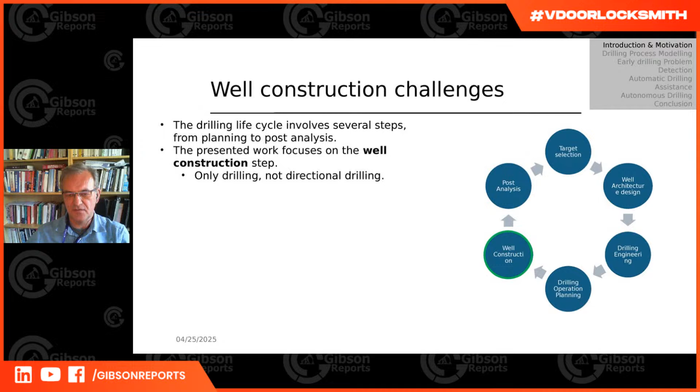So for the introduction and the motivation, I like to focus on the fact that in drilling there are many different aspects - target selection, designing wellbore architecture, and all these kinds of things. This presentation for today will focus only on well construction, the operational part of it, and the rest can be left for another topic.

Oh wow, that's a bit of a messy slide, but the point of this slide is just to say that most of the software used out there uses steady-state models, and steady-state models are not really well adapted to actual drilling operations, just because there is a lot of transient periods. As you can see here, during this friction test, the steady state model, shown in green curves, will jump right from free rotating weight to pickup weight, and then just jump to slack-off weight, while actually the measured values are changing slowly. This is reflected by the fact that there are some transient effects that are happening.

The point also with drilling operations is that there are quite often drilling incidents, and these drilling incidents are causing delays. The more we try to avoid those incidents, the better it is actually for the efficiency of the drilling operation.

So the other thing is that there is a lack of consistency. If you see here a set of friction tests executed by drillers, there is a lot of variation in this series of friction tests, even though they are made in the same operation. That is not very good to extract information out of the drilling operation. Probably some of those friction tests are not efficient, and others are not capturing what they should have been capturing.

So the question we have been working on at the research center is: can we do a mathematical modeling of the drilling process with enough detail that we can reproduce what is observed? And therefore we can use that model for providing inputs during the drilling operation.

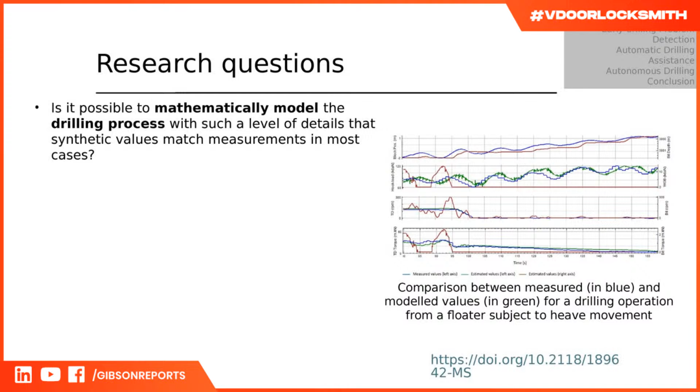So here you see a drilling operation offshore of Norway, where there is heave. You can see that when we are drilling, there are variations of the block position because of the imperfection of the heave compensation system, and there are very large variations in the weight on bit. Even though these variations are quite complex and affecting the drilling process, the modeled values are getting very close to the actual values which are measured. This shows that it is possible to do this drilling process modeling at a very good level of detail, which can match reality.

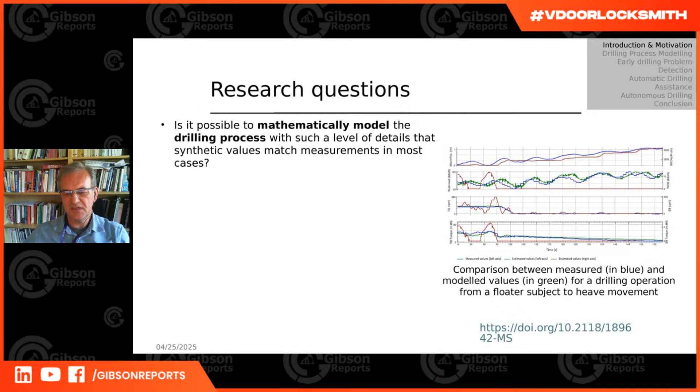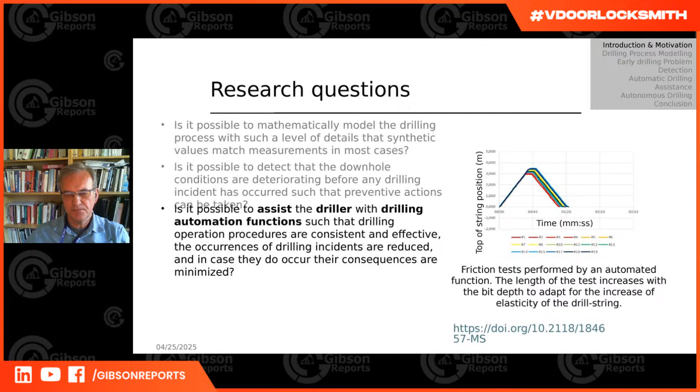So how can we achieve that? How can we do all this? How can we answer all those questions that are listed there?

First we need to start with trying to model the drilling process as precisely as possible. This is strange because there are quite a few things jumping over, but okay, that's the way it is with the presentation.

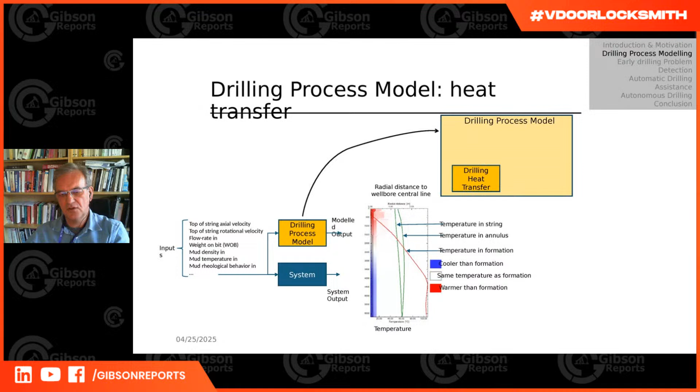One of the first things we need to consider is that in drilling operations, we have very large gradients of temperature between the surface and the downhole conditions. Therefore, we need some kind of modeling of the heat transfer during the drilling process. This is done by a heat transfer model, which calculates the temperature of the fluid inside the string, the temperature of the string itself, the temperature of the fluid in the annulus, and also everywhere in the casings and formations. This allows us to calculate the temperature conditions everywhere in the system.

Now the sources for this calculation are coming from different conditions. There is the advection of fluid into the transport. It should have been an animation, but I see the animations are not working on the display, so sorry about that. There is heat generated by the pressure losses, because these pressure losses are converted to heat generation. And there is also heat provided by the mechanical friction of the drill string against the borehole. All these change the conditions of the drilling operation.

If the animation had been working, you would have seen that for the first 6 hours of starting the drilling operation with circulation and rotation, there is a drastic change in the temperature conditions into the well.

So you see that we had the model which has to do with drilling heat transfer. We need a model for drilling hydraulics to calculate the pressure losses. We need a model for drill string mechanics to calculate the friction. And these are actually giving inputs for the drilling heat transfer calculation. So there are some mutual interactions between those different models.

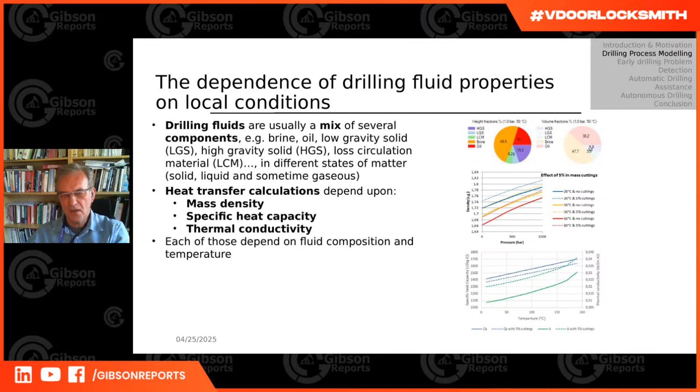If we carry on, we can see that the drilling fluid is a mix of different components, and each of those components has different PVT behavior, specific heat capacity, and thermal conductivity. Each of those values depends on both the temperature and pressure conditions. That will influence the calculations for hydraulics and mechanics, because the change of heat will impact the calculations for drilling hydraulics and drill string mechanics.

In addition, we are transporting cuttings. Those cuttings change the composition of the fluid, because of the solids that they are transported. If the animation had been working, you would have seen that both the mass density, the specific heat capacity, and the thermal conductivity would be impacted by the cuttings which are transported through the drilling process.

And conversely, this change of the thermophysical properties of the fluid impacts also the heat transfer that we have into the drilling process.

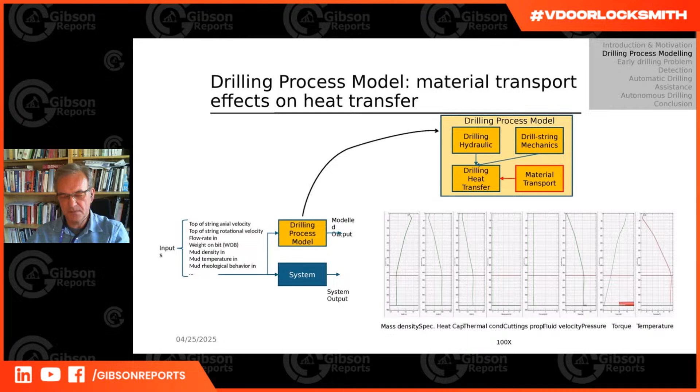Then we can continue with the pressure losses and the impact of the temperature and pressure conditions on the rheological behavior of fluids. There, again, we have strong variations of the rheological behavior as a function of pressure and temperature.

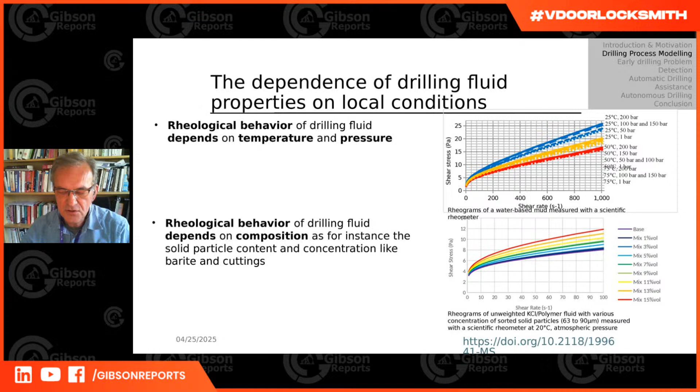As already mentioned, cuttings being transported also impact the rheological behavior. You can see on the lower graph that the rheological behavior at the same conditions of temperature and pressure varies a lot depending on how many cuttings we have in the fluid. All this has been measured with scientific rheometers for getting accurate results, so this is reality, this is not synthetic data.

Now, considering this, we have an interaction between the heat transfer and the material transport on the drilling hydraulics. If the animation had been working, you would have seen that during the drilling process, when we are producing the cuttings, the rheological behavior of the fluid is very different in the annulus when it is starting to transport cuttings.

So we start to have quite a few correlations between the drilling hydraulics, the drill string mechanics, the material transport, and the drilling heat transfer. And then we can detail more what happens with the cuttings transport.

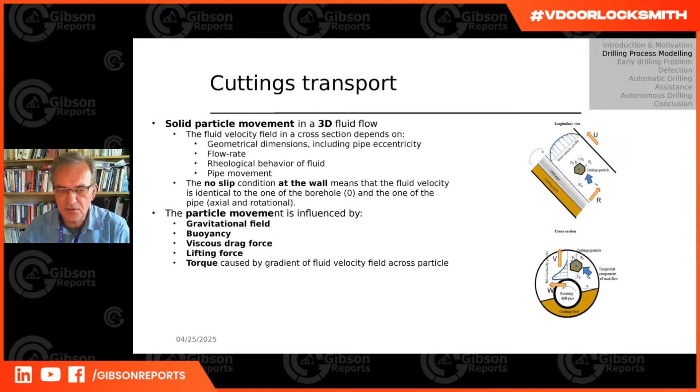So the particles are moving in a complex path depending on this fluid velocity field that we have into the annulus. And they can get transported directly if they get caught into the high velocity field, which is usually on the high side.

But some particles may be deposited on the low side, and others may be transported simply by erosion of the cuttings bed, if there is a cuttings bed which is forming, and if the drilling conditions are changing. So maybe some of the cuttings into a cuttings bed get resuspended and get transported on the high fluid velocity field on the high side.

So there is a lot of variation which can happen during the drilling operations, and the cuttings transport is a very transient phenomenon.

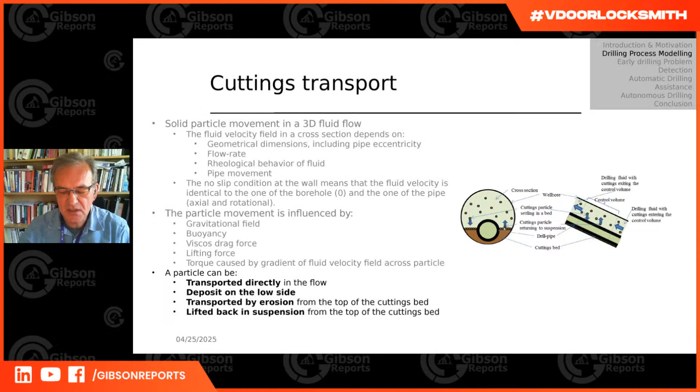So again, there is no animation, but the point was to show that actually when we do a connection, the cuttings which were transported in suspension may go back into a cuttings bed during the connection time, because in this horizontal well, the distance for the cuttings to sediment is very short.

And then when we restart the circulation, if we don't have the rotation, this cuttings bed doesn't disappear instantly. It takes time, and it's only when we have the rotation of the string that we can start to lift the cuttings which are on the low side towards the high side, and the cuttings bed disappears. So again, at every connection, you may have quite a lot of variation in the positions of the cuttings during the drilling operation.

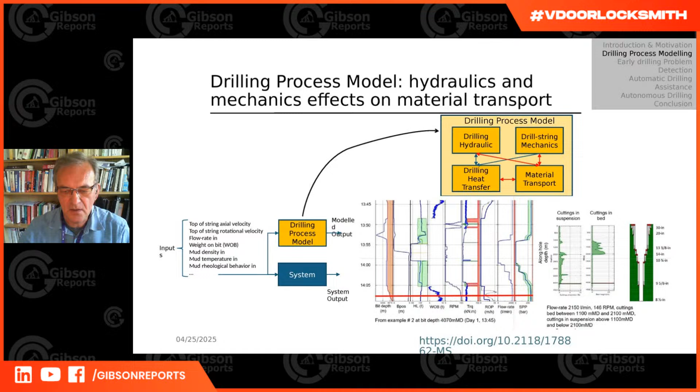And then also the cuttings get grinded when they are transported. Some of the cuttings particles are transported on the high side, and they don't get trapped below tool joints along the string. But some others may be more unfortunate and get trapped between the tool joints and the borehole, and because of the rotation, they get grinded.

And depending on how many times those particles are grinded, some particles may never be grinded at all, and they will come to the surface as they have been produced by the bit, relatively large. And some others may be more unlucky and get grinded many times, and they get smaller and smaller and smaller.

And that's what we observe at the shakers, at the level of the shaker, is that we have a large distribution of cuttings particle size which arrives there. And that may depend on the size and the duration of the operation.

So the cutting size distribution for a 17.5 inch operation is different from the particle size distribution for a 12¼-inch or 8.5 inch section, and depends also on the energy which is provided to the rotation of the string. So the more rotation you put, the more grinding you can get also.

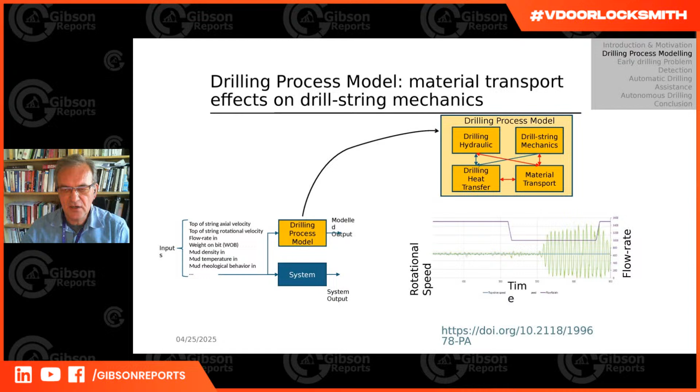And when we start again and regain the flow rate to a larger value, these stick-slip conditions disappear after some time. So there is a direct connection between material transport and string vibration effects.

And talking about string vibration, an important thing that we learned is that there is a transition between static friction and kinetic friction. This transition between static and kinetic friction is very important because it creates specific conditions for how the string behaves when we start rotation, when we change directions, and all these kinds of things.

So we use an Stribeck model for the transitions between static and kinetic friction. We also solve the problem of what the actual friction force is when we are in static conditions, which is undefined from the friction equation, but is defined by the equilibrium of the string. And this is quite important too, to keep the string non-moving when we are in static conditions.

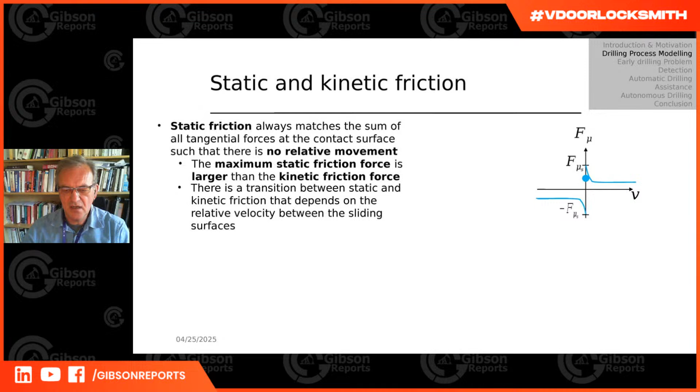The other things we've noticed is that when there is rotation or movement, the kinetic friction is more or less constant regardless of the direction. The friction force is always opposite to the displacement vector. And that means there is an easy path between the axial movement and the tangential movement, so you can easily move from axial displacement to torsional displacement because the kinetic friction magnitude is more or less independent of the movement itself.

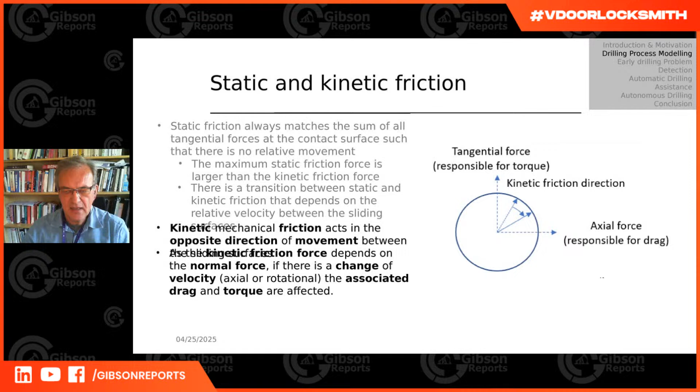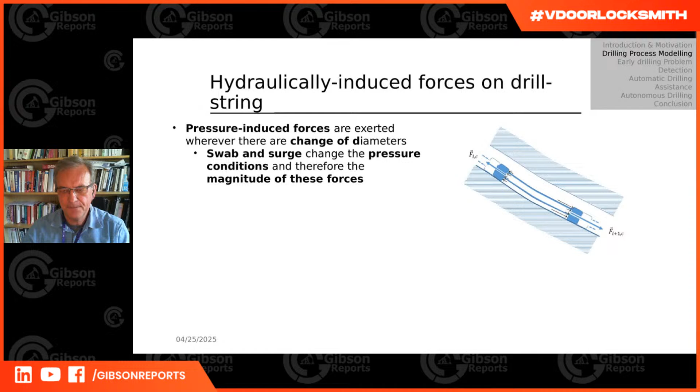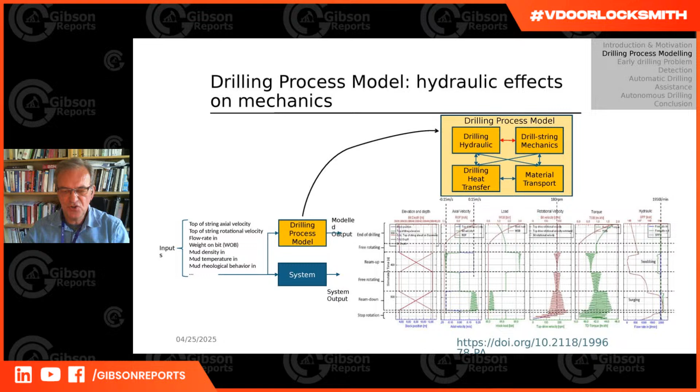So there is a direct interaction between drilling hydraulics and drill string mechanics. As you can see from this graph, the hydraulic model, the drill string mechanics, the drilling heat transfer, and the material transport are in complete interaction between all four modules. You can't consider one independently of the others; each of them influences the others completely. So it's really important to consider all those aspects at the same time, including the mutual interactions between those different models.

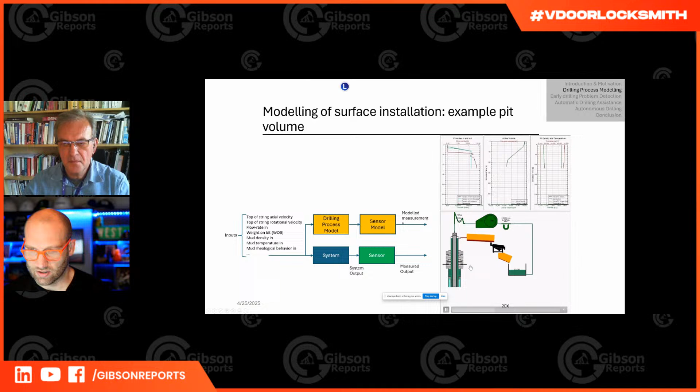And that gives Eric, actually the— yep. I'll pause you real quick. Is there a possibility you can share your screen with the presentation, so the animations will come through? Yeah, I can present. How can I share? If I click on present... present, and then at the very bottom of that list it should say share screen. Yep, okay. Yeah, share screen. Yes. Can I share the whole screen? Entire screen? Yes, I see that. Share. Nothing happens, let me remove... Okay yeah, so no that's me. Yeah, no, okay I think I'm sharing. There we go, yes, okay good. Let me see if I take this presentation. Yes. Okay yeah, and then I will go to, yes I was there. And if I do like that, yes, do you see the— yes. Presentation? Yes. And do you see the animation? No. Let's see here, do you see the graph which is evolving here? Yes, everything's going, let me just— there we go, we can make it a little bit bigger. Okay yeah, so everything's working now. There we go, okay good. That's good.

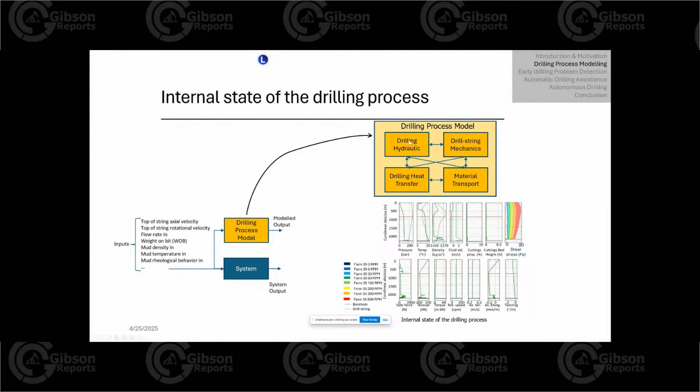So what we've seen is that by having these four different models—drilling hydraulics, drill-string mechanics, drilling heat transfer, and material transport—tightly connected together, we can calculate the complete internal state of the system. This internal state is shown with these different graphs: pressure, temperature, density, fluid velocity, cuttings proportion, cuttings bed height, rheological behavior, side forces, tension, and plenty of other things. With the model we've developed, this internal state is calculated every 10 milliseconds and updated compared to the inputs we give to the drilling process.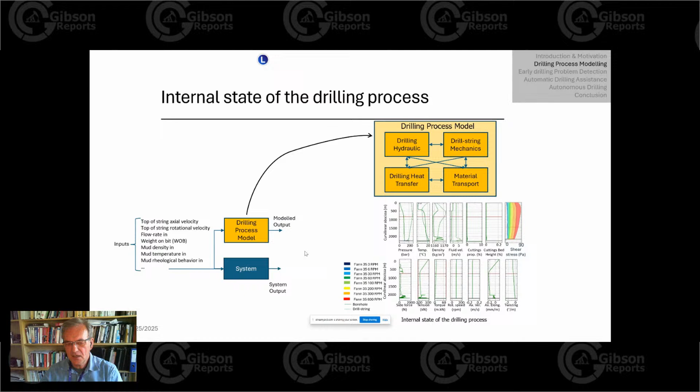So that sounds good. And we do manage to reproduce very well, actually, the output of the system, where it is measured. For example, the standpipe pressure and the hook load and all these kinds of things. But there is an additional complexity, and this additional complexity is that actually what we measure with sensors is not necessarily the same thing as what happens in the physics.

I'd like to illustrate that with the pit volume. If you think about the flow rate in and flow rate out, and you want to detect a kick or things like that, you want to know what is the flow rate out of the well. And the point here is, before you get a change into the volume of the pit, that will happen after the fluid has been transported through the flow lines, has been separated with the cuttings at the shale shakers, and the remaining fluid is getting back into the pit.

A lot of people are talking about wellbore breathing and other things, but there may be wellbore breathing, but most of it is explained by two things: compressibility of the fluid inside the well, and the retention of fluid into the surface installation, transport of fluid.

And you can see here also we model actually the flow of fluid into the open channel for the flow lines, and the separation of the cuttings into the shale shakers. And you see how much delay there is and how much retention of fluid there is into this system.

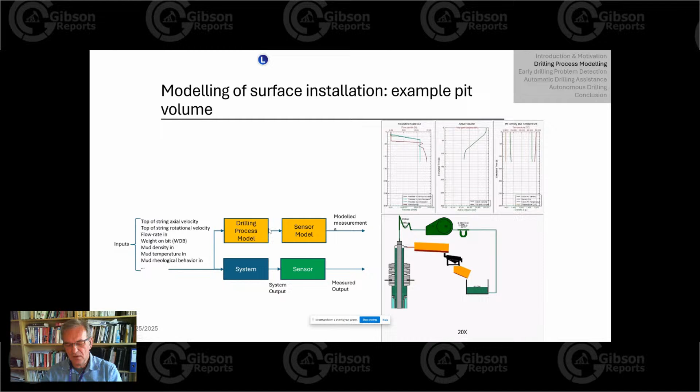Another thing I would like to draw attention to is that even things which are very well accepted and well used, actually the Fann 35 rheometer values, you should be aware that they are not correct. Because actually the Fann 35 rheometer gives you a translation of torque into shear stress, assuming that the fluid is Newtonian. And as we don't use Newtonian fluids, this conversion is wrong.

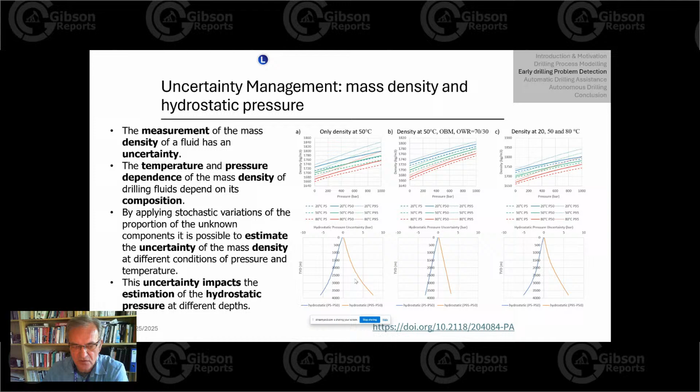I would like to illustrate the fact that even the density of the fluid is somewhat uncertain, because first it's measured with instruments which are not very precise, but also it depends on pressure and temperature. This PVT behavior that characterizes this pressure and temperature dependence is usually not measured, so we rely on models, and those models are again not completely correct, so they have some uncertainties. That can give quite large differences in estimations of hydrostatic pressures at depth. When you have geopressure windows in the region of 10 or 15 bars in some regions, as we have somewhere in Norway, if you have an uncertainty of plus or minus 5 bars just on the hydrostatic pressure because of the uncertainty of the density at different conditions of temperature, that's quite dramatic.

The measurements of rheology, as I explained, first need to be corrected for all those non-Newtonian effects, but depending on how you read your rheometer, especially if you use a mechanical rheometer like the Fann 35, you may get different results. That has to do with thixotropic effects in the fluids, and you need to wait quite long before the measurements are stabilized. Because of static friction in the mechanical rheometers, you usually can't see those effects - you really need a scientific rheometer to understand how important they are. That means the same fluid measured by different people can give different results simply because of those thixotropic effects.

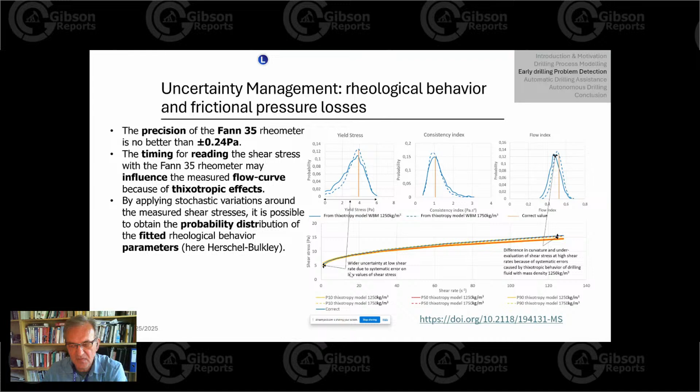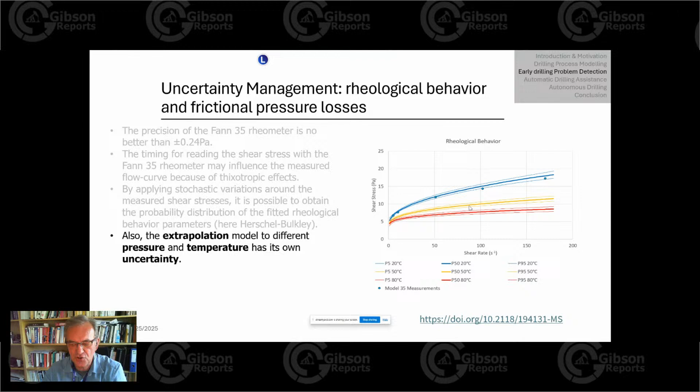And then when you want to use that rheological behavior at different conditions of pressure and temperature, you need to use a model to extrapolate, and again the extrapolation from the model gives some uncertainties. As you see from this graph, the measurements are shown in blue. The extrapolations are made using models, but they are associated with P5 and P95 margins for the uncertainty on these measurements, using the models that are used to extrapolate for different conditions of pressure and temperature.

So some of the information is uncertain, or not necessarily uncertain, but ill-defined, and therefore we also need to adjust the calculations that we have with what is measured.

But this information may not change during the drilling operation. So, for example, the linear weight of drill pipes, the exact internal diameter of drill pipes may not be known exactly at tenths of a millimeter accuracy, and that impacts quite a lot the pressure losses inside the string. Half a kilo per meter error on the linear weight of drill pipes may also impact quite a lot the free rotating weight, so we need to do some corrections.

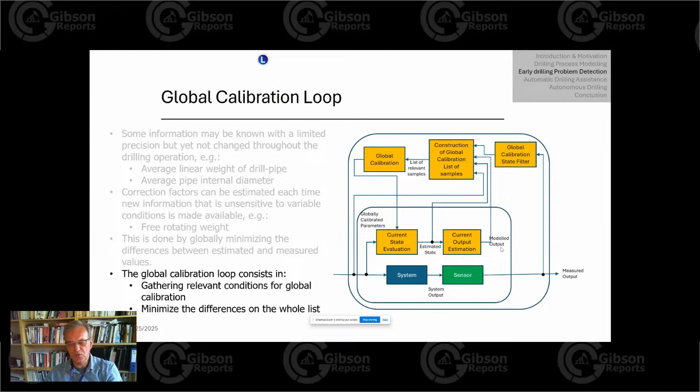But not all the parameters are unchanging through time. There are some parameters which change with time, like the mechanical friction or the hydraulic friction. It's not that the friction itself is changing, it's that there are some additional effects which are not accounted for by the model, which influence the results.

So there we use local calibration loops, which make sure that we calibrate the model so that it actually fits the measurements. You can see here with this friction test, with a free rotating weight period, then stopping the rotation, then doing a pickup, and then a slack off, the model matched very, very well compared to the first slide I presented, where we were using this steady state model.

You see that the transient model has a very good match, and it also accounts for the fact that the driller forgot to zero torque the top drive when he stopped the rotation. So there is still twisting of the drill string while we are doing this pickup. Even when we are finished with the slack off, the drill string is still twisted inside the well, which means we have not yet measured the true pickup weight or slack off weight for this test. But the calibration of the friction factor has been able to be done, even in these strange conditions.

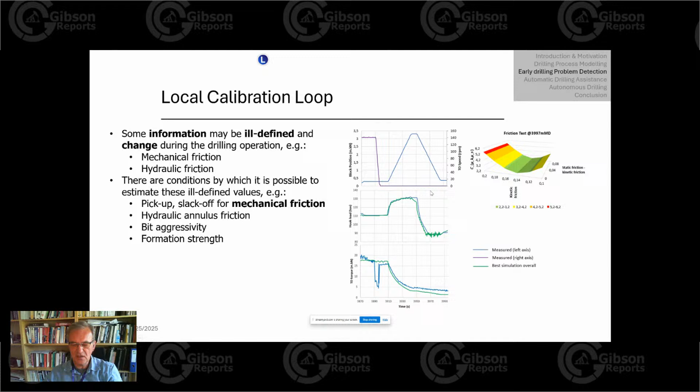Therefore, we can add, in addition to the global calibration loop on top of the digital twin, these local calibrations for a certain number of parameters, like the mechanical, hydraulic, formation strength, and bit aggressivity. With that, we've got a system which can tell us what is expected, but with the uncertainty.

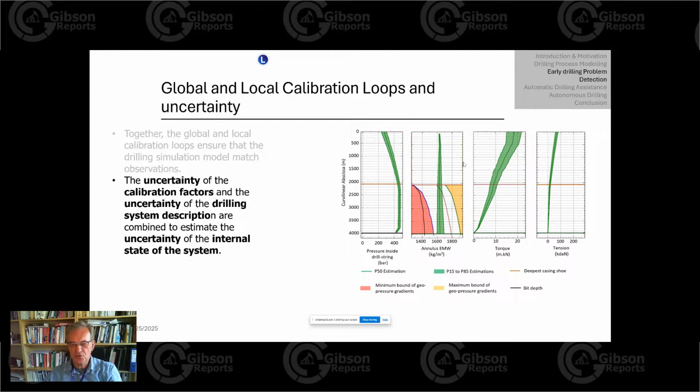Depending on the quality of the calibration which has been made, the global and the local calibrations, this uncertainty may be small or large. So there is also a reflection through this uncertainty of the quality of the work which has been done for the calibration, and therefore it gives us more or less confidence on any potential detections of abnormal conditions.

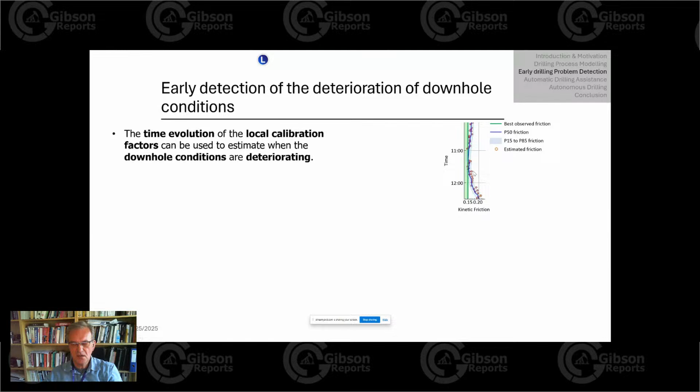So what happens if you see that the friction was relatively steady and then suddenly starts to increase like that? You see again that this friction has been calculated with some uncertainty, which is this blue, light blue band, indicating the P15 and P85 margins for the calculation of the uncertainty of the friction. But then you see that you are deviating so much that you are very outside the initial conditions you had here. So probably there is something deteriorating in the hole, and this is a good indication that it is time to think about what is happening there.

Another thing you can see from this animation is this gauge showing the hook load. There is a needle, and then there are two triangles in green, which follow the needle, but sometimes the needle goes much below the lowest triangle. Those two triangles represent the uncertainty that we have on the measurements or estimation of the hook load. You see that sometimes it's going above, sometimes below, and that's indicating some set down weights and overpulls.

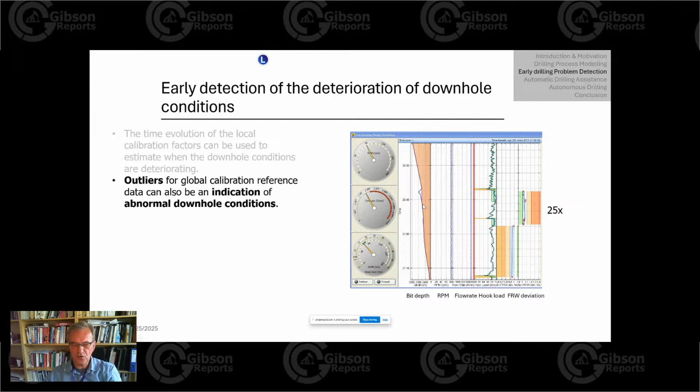So that is also a way to detect abnormal conditions, when you have some small deviations compared to what is expected. And then I need to change my presentation to the second one.

Okay, here. Eric, try to go back and redo it. When you do the present and then it says share screen, instead of entire screen, hit window. That might make it so, because there was a lot of blank space on either side there. Okay, so let me try to find. There's some details in there, I want to make sure that everybody's able to see.

Sure, so I go to present and then share screen and share. We do have one question as you're pulling that up: are references used to develop the model available in the public domain?

Many of the models that I've been talking about now are not available in the public domain, but we are working on a transient torque and drag model that is being developed right now, which will be put in the public domain in the open source drilling community site. That will be available towards the end of the year. It's a very fast transient torque and drag model with axial, torsional, and lateral modeling.

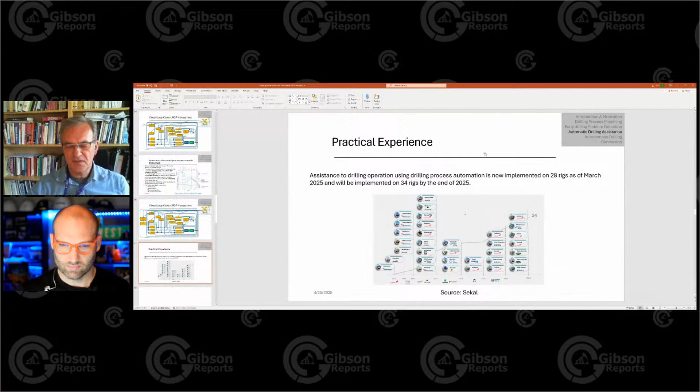Hopefully that can be useful for some people. It's developed in C#, and will be packaged into a microservice that everyone can use—no royalties, no fees. Hopefully that can be a reference for people afterward.

As a reference also, we have a simulator which is available online. You don't get the source code, but you can use the simulator. It's called Open Lab Drilling. If you search for Open Lab Drilling, you'll get access, and you can run the simulator for half an hour at a time for free with a Google account. If you want to run simulations longer than half an hour, you need to pay, but you can do a lot of simulations lasting less than half an hour.

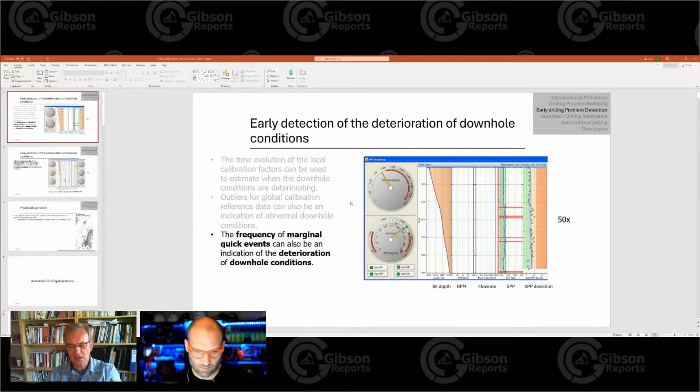Going back to the questions of detecting abnormal conditions, here is an animation showing a situation where we have poor cuttings transport.

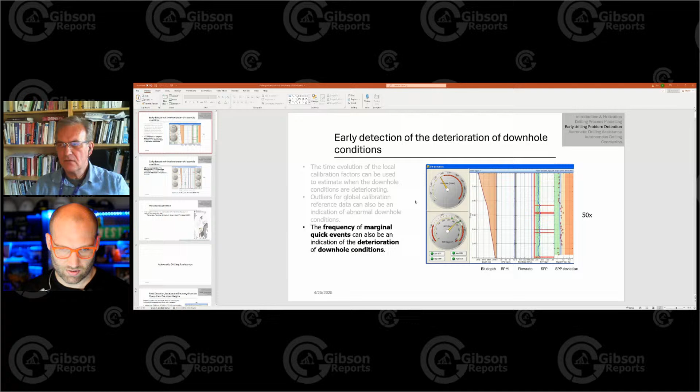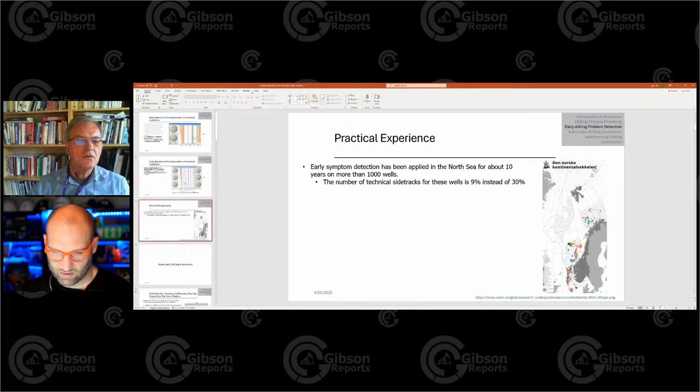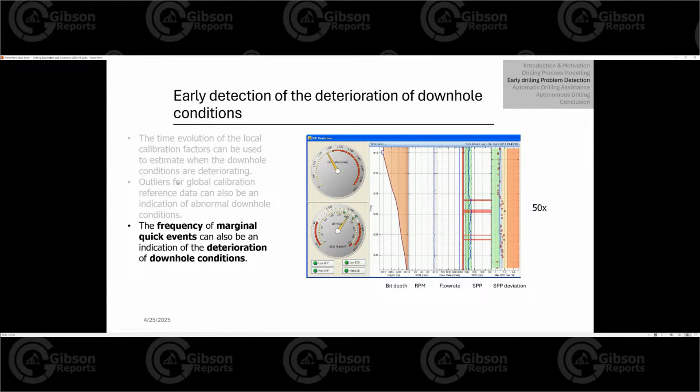You see here—Eric, can you make that full screen? It is full screen, on the presentation or in the PowerPoint portion. It's, yes, in the PowerPoint view. Is it? Okay. Because I'm doing the slideshow. Yes, and when I do slideshow, you don't see the slideshow? No, it's still in the previous view. Ah, okay, maybe reader view. Should be the next one over from there. Slideshow. View. Reading view. Okay, still—that's because my screen is very large. Oh, that's okay, that's okay. It'll still work, I'll just set it larger and put you down at the bottom. Sorry, I don't need to be on the screen. No, it's okay, all right. I'll let you keep going.

So basically, what we see in this operation is we are drilling and circulating, and you see the blue curve here in this standpipe pressure track is the actual standpipe pressure which is measured. The green curve is showing the one calculated by the model, and you have a band of green showing the uncertainty on those calculations. As you can see here, there are some periods where the actual standpipe pressure is slightly larger than expected, and then it returns back to normal conditions.

But it more or less stays within the margins of the uncertainty. This translates into some standard deviation in the distance between the actual standpipe pressure and the estimated standpipe pressure. This can be an indication, if this standard deviation is changing, that there are some changes in the downhole conditions.

There's another condition which also shows how these weak symptoms we're talking about can be used. Here is an operation—you see the needle showing the standpipe pressure, and the two green triangles showing the margins that should be accepted. You see that we are overpassing the margins with some high pressure spikes. This impacts the drilling operation and the driller pick off bottom, because you see there are some pack-off tendencies. At the end, we just stop the pump because there are more and more pack-off tendencies coming.

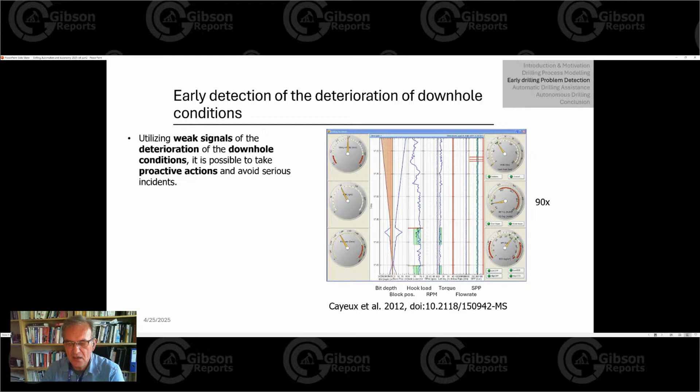So this is not only research—this has been used in the North Sea for the last 10 years. More than 1,000 wells have been drilled since the start. Using this type of weak symptom detection, the number of technical sidetracks for those wells has reduced from 30% to 9%. Just to let you know, drilling in the North Sea is very complicated because we have a lot of brown fields and quite difficult conditions for drilling.

That's why there were initially quite a lot of technical sidetracks happening. But there has been a very visible impact using this weak symptom detection for taking proactive actions on the improvement of operations—and that's a good sample of data when we're talking about more than 1,000 wells.

Now we move to assistance to drilling operations, drilling automations.

And the first topic I would like to address is what is called fault detection, isolation, and recovery. I will not go through all the different types of FDIR, but I will exemplify them with one, which is the detection of overpulls and set-down weight.

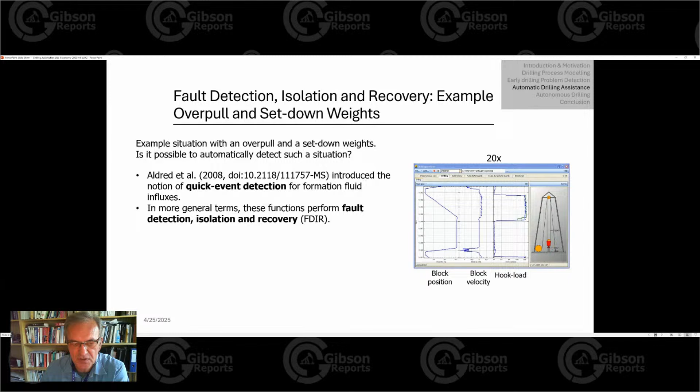Now, the detection thresholds need to depend on the context, the current conditions. So you may have some parameters which are changing fast, like the flow rate, like the air gap into the drill string, and so on and so forth. Therefore, you need to pass that type of information to the drilling control system so that it can react fast to those abnormal conditions.

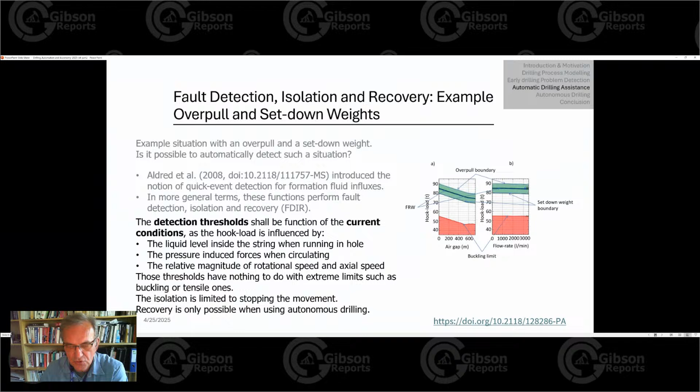So what happens is we have a drilling controller, the drilling control system, which is controlling the mud pumps, the top drive, the drawworks, or the hoisting system. There are some set points which are provided, and usually those set points are going directly to the controller. The controller manipulates the machines at the surface, and that influences the system. And then we have some measurements which are made.

And these measurements are utilized by this current state estimation, so all what I've explained in the previous part, which is this digital twin and the calibration mechanisms. And these calibrated models are used actually to calculate what are the thresholds by which the system should detect that there is an abnormal condition.

And when there is an abnormal condition which is detected, the FDIR function switches off the set point coming externally and replaces the inputs to the different controllers with its own procedure, typically described by a finite state automaton, which will try to isolate the problem in the first place, and then later possibly recover from the situation. So that's basically this notion of fault detection, isolation, and recovery - an automatic system which detects an incident and reacts immediately to avoid an escalation of the gravity of the situation, and that depends on this current state estimation.

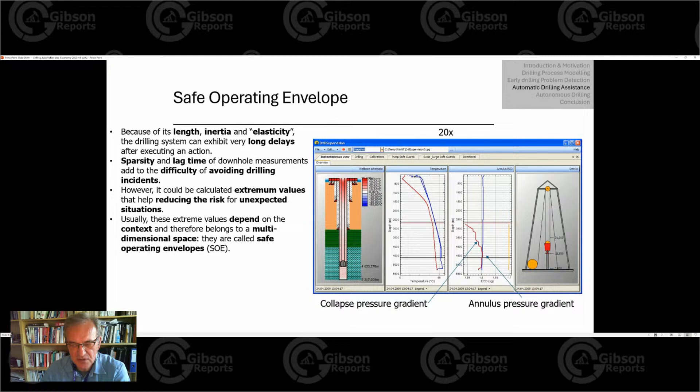You see here an animation from a real operation where we are pulling the string. We see downhole pressure in ECD as we are pulling the string, and we can see how the downhole pressure is below the collapse pressure, which is actually making the well collapse. So the speed by which the string should have been manipulated should have been much lower, so that we didn't go below the collapse pressure limit. So that's what we want to do, is to make sure that we have safe operating envelopes which are respected while we are moving the different components, like either the fluid or the drill string, either axially or rotationally.

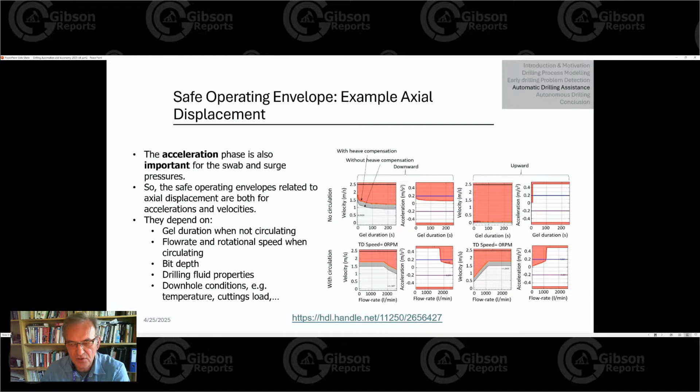And these safe operating envelopes are, for example, shown here for the axial displacement for swab and surge. They are both values which correspond to velocity, but also to accelerations. And there are different types of conditions, whether we are going downwards or upwards, whether we have circulation of fluid or no circulation, and whether we have gel durations or no gel. So all this can change quite fast, and therefore needs to be updated continuously to adapt to the current drilling conditions. So we add a new layer on this schematic for the control of the drilling operation.

The first, the innermost layer was the drilling control system. The next layer was the fault detection, isolation, and recovery functions. And then we have a new one, which is about the safe operating envelopes.

The role of the safe operating envelopes is actually to cut the set points which are passed to the drilling controller. So if the value is too high, then it's the value from the safe operating envelopes which is used. If it's vice versa, if it's a minimum value, if it's too low, it would be the safe operating envelope which is used.

So that means this can be used also in manual mode. It doesn't need to - both the fault detection, isolation, and recovery and the safe operating envelopes can take any kind of set points, whether they are coming from manual commands from the driller or from an automation system. And that's important. So the placement of those functions into the hierarchy of control is very important to allow for protections also in manual modes.

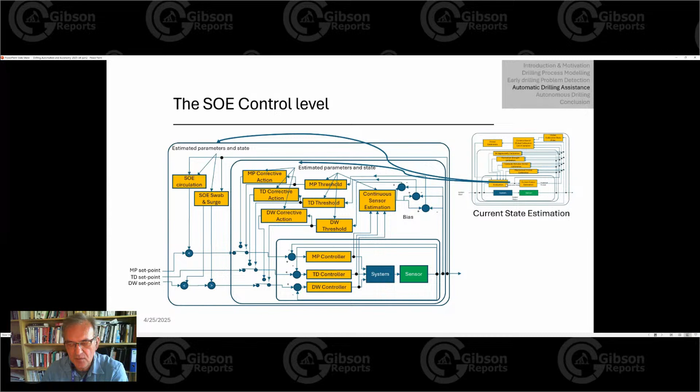Of course, the safe operating envelope depends on context and therefore depends on all these calibrations and digital twin that we described earlier. And then you have controllers like auto drillers. So the work that we've done is really based on the bit-rock interaction model from Emmanuel Detournay.

This model is based on 3 phases for the functioning of the PDC bit. Phase 1 is directly proportional to the depth of cut, and then there is a boost of performance in phase 2, because the friction part of the cutters is not increasing, it's stable, and therefore you can have a larger removal of rock for the weight on bit. And then in phase 3, you are going beyond the founder point, and you are starting to increase again the friction part of the cutters on the formations, causing lower performance of the bit.

So the model calculates the estimated ROP, which is shown with these different colors, as a function of the weight on bit or rotational speed, and as a function of the flow rate. And it also calculates the constraints that need to be respected.

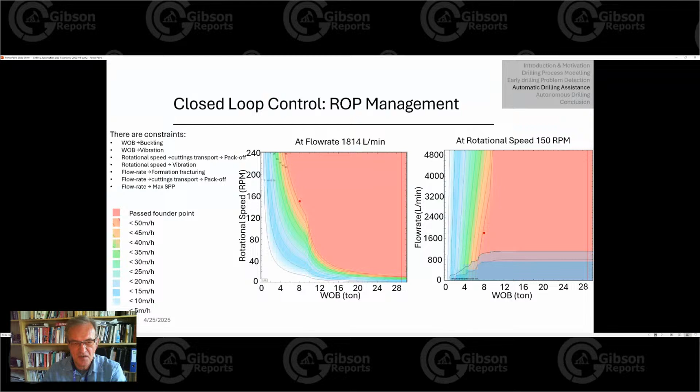You don't want to buckle, you don't want to have vibrations, and so on and so forth. So you have those limits which are shown here with these zones indicated, and that means the auto driller configuration is both trying to maximize the rate of penetration without going into phase 3 of the bit, and at the same time respect the constraints that have been given to avoid producing too much cuttings compared to, for example, the transport of cuttings capability of the circulation that you have there.

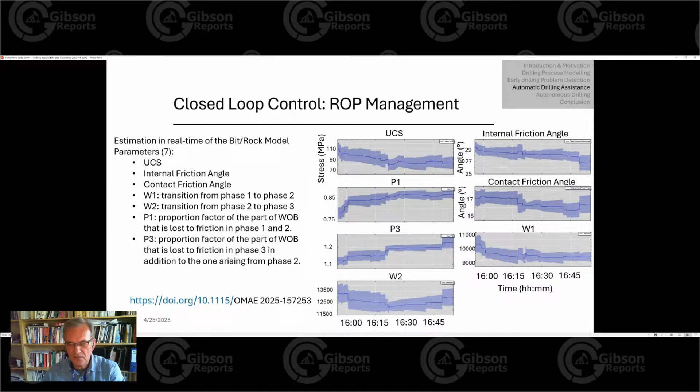And then the system calibrates the model from Emmanuel Detournay. There are 7 parameters for this model, and it calculates those 7 parameters using a particle filter method. And again, you see that the estimation of those parameters is made also considering the uncertainty on those estimations, which is shown with this bound showing the uncertainty for each of those parameters. Again, uncertainty is a constant problem or constant feature of all what we are doing in what I'm presenting.

So, new layer on top of the safe operating envelopes, we have a certain number of constraints. We have an estimator, and then we have the controllers for performing the ROP management. Actually, there are a little bit more things than that, but that's the major part of this one.

Then we move to the next topic, which is the standard procedures, which is the last part for the different types of functions. Standard procedures can be a lot of things. That can be a pump startup, that can be a top drive startup, it can be a friction test, which is the one that I take as an example here.

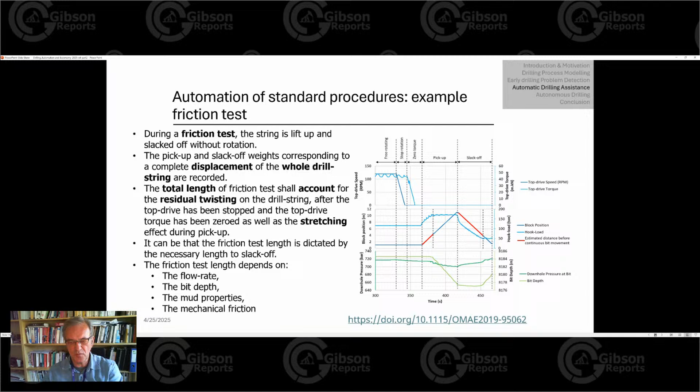So these standard procedures are not simple things. They need to be parameterized compared to the context. This distance depends on the length of the string, the elasticity of the string, the effect of pressure on the string, but also the friction, to know that you will perform a good friction test. What's fundamental for performing good standard procedures is that they should be optimized compared to the current context.

So we have a new layer added to this schematic, the control hierarchy, which corresponds to the standard procedures. The standard procedures are typically described with finite state automata, which provide the commands or set points to the rest of the control hierarchy.

But that means that all the standard procedures are protected by the safe operating envelopes and by the fault detection, isolation, recovery. So if during the friction test there is an overpull, the fault detection, isolation, or recovery will stop the friction test and start to do proactive actions to avoid escalation of the problem.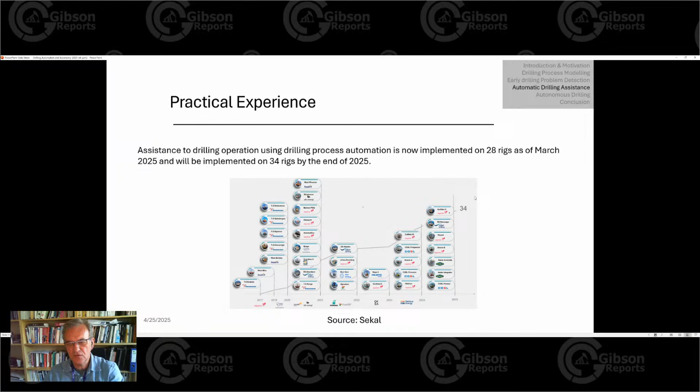Again, this is not only theory, this is not only research, this is actually being used. It's implemented on, as of March, 28 rigs in the North Sea, and that will be implemented on 34 rigs in the North Sea by the end of 2025. I think by the end of 2026, almost all the floating rigs in the North Sea will be equipped with that type of technology, which shows that this is used every day in the North Sea.

And now we can finally go to autonomous drilling. I'd like first to start with the notion of taxonomies for drilling automation.

John de Wardt, when he worked on the SPE drilling automation roadmap, used the classification developed by Luca Save and Beatrice Feuerberg. And he came up with that particular setup for the classification of automation systems.

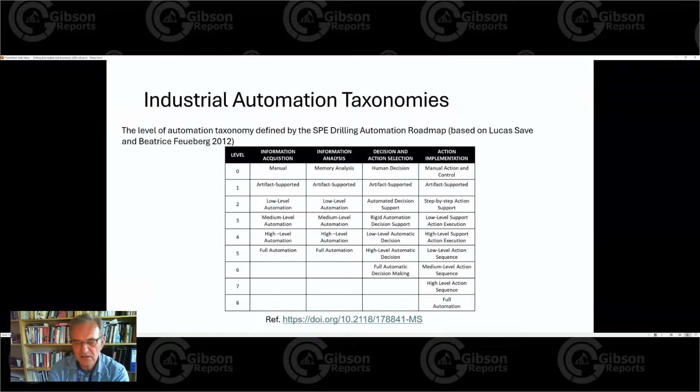One characteristic of this classification for automation is that it says, in a way, if there is no human intervention, it's fully automated. And that's okay. But that doesn't mean that this is actually autonomous. Autonomy is something different from automation, and that's what I would like to argue.

Together with John de Wardt, Rodica Mihai, John Macpherson, and Dimitrios Spirovoulou, we worked on how we can classify or what would be a system which is an autonomous system. We came up with a list of different traits that an autonomous system should have to be qualified as an autonomous system. This is very different from simple automation.

Basically, what those traits say is that the system has a goal, it's adaptable, it perceives its environment, it makes decisions, it takes actions, it learns from experience, it has strategic and tactical abilities, it is independent, it can collaborate, it is self-contained, and so on and so forth. You see that these things are not necessarily what you can do in the classical cybernetic world. It's at a much higher level, more AI-oriented type of thinking.

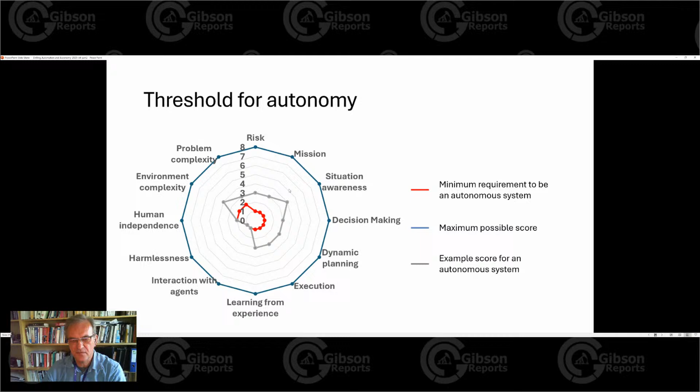So it needs all those features, all those traits to be able to qualify for an autonomous system. I would say the big difference between automation and autonomy is that automation corresponds to what happens in the spine. You have a lot of functions of the body managed by the spine. This is automatic functioning, breathing, heartbeats, and all these kinds of things. But autonomy has to do with the brain. There is a need for having a goal, a need for taking decisions, which is not at all what happens at the level of those automation systems. So how can we achieve that kind of autonomous system?

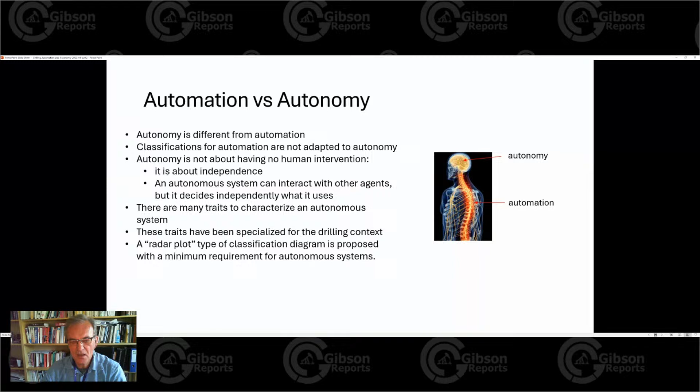Well, as I said, it needs to take decisions, and to take these decisions it needs to be performant: drill fast, shorten the weight-to-weight procedure, quick pipe handling, and at the same time balance that with the risk. We want to avoid vibrations, pack-offs, formation fracturing, and so on.

So it's really a multi-objective optimization problem. The way we try to solve that is to represent the balance between performance and risk through the estimated time to reach a section, TD. If we minimize this estimated time to reach section TD, we are both performant and managing the risk. This time to reach section TD is a sum of the time for each of the actions we are planning dynamically, plus the cost of any incidents, which are associated with probability distributions, and the cost of solving the problems caused by those incidents.

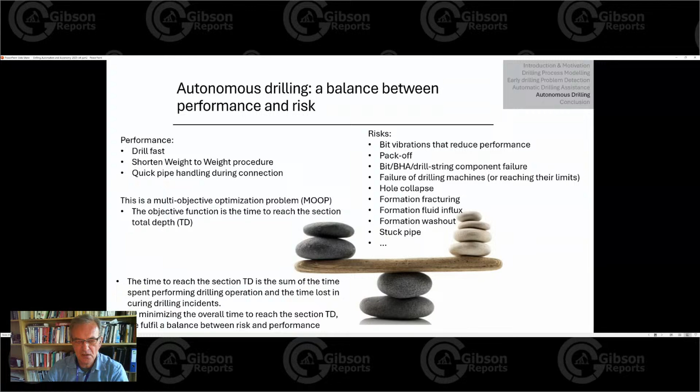So by solving that, we can have a system which can take decisions. The way it works is we use this estimation of the downhole conditions using the weak symptoms I described earlier, and then we estimate the probability of different deteriorations which can carry risk. Then, based on those probabilities, we estimate what the consequences would be for the time to reach section TD.

The method used to solve that is an algorithm called the Markov decision process, which estimates at every change of state of the system what action will optimize the time for reaching section TD, accounting for the short term, medium term, and long term. So it's a multi-time-horizon estimation of the decision, meaning the system can take actions which look like, in the short term, they decrease performance, but which can have a positive effect in the long term because you may avoid some escalation of downhole deterioration while operating.

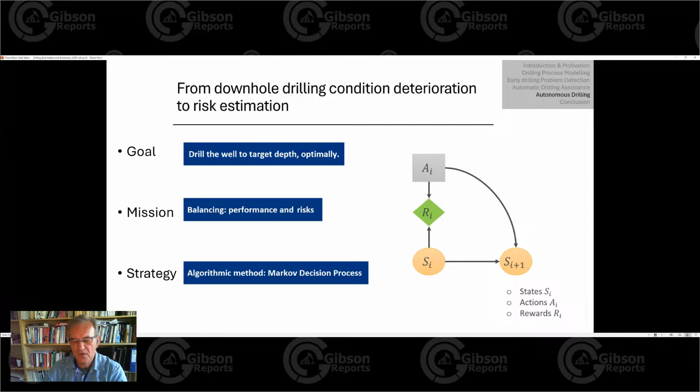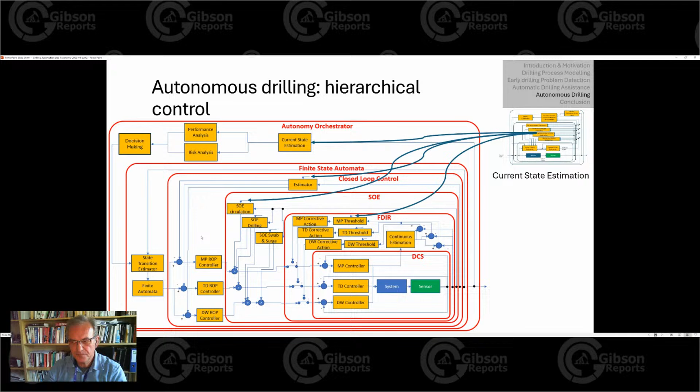So going back to this hierarchical control that I've explained, we have the final level, which is the autonomy orchestrator. It takes the current state estimation, performs this performance analysis and risk analysis, and takes decisions on which of those available functions or standard procedures to activate in order to drill the well.

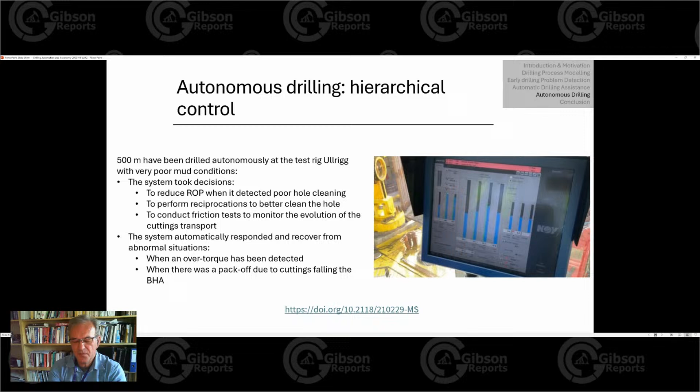And this is not only theory - it has been tested on a test rig we have here in Norway called Ullrigg. You see here a movie of this operation. We drilled 500 meters completely autonomously on Ullrigg, where all the decisions, all the actions, were made by the autonomous system. You may note that our driller, Arild, doesn't touch anything.

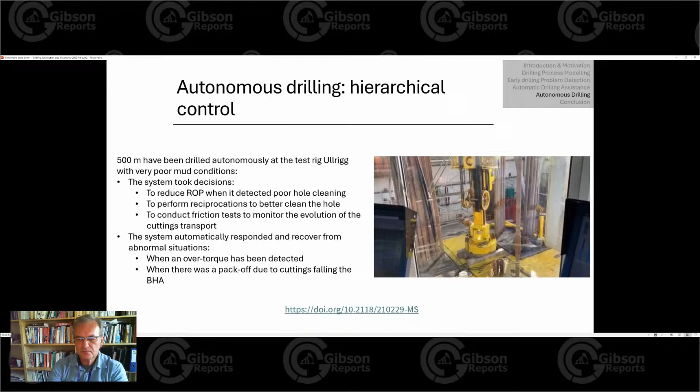He doesn't have his hand on the joystick, doesn't manipulate the keypads. You will see that the system has taken a decision to make a reciprocation because there is poor cuttings transport, and therefore it decided, in the middle of this stand, to try to lift up all those cuttings because they were starting to accumulate around the BHA. Just there, you see the reciprocation has started, and this is not decided by Arild - it is decided by the system itself. So that shows this kind of autonomous system.

So now, finally, I've got to the conclusion. Sorry for taking so much time.

What I want to highlight is that there are a lot of transient effects, and it's important to account for them. It's important to estimate the internal state of the system, which is very poorly observed by the sensors. But at the same time, we need to model how the sensors work, because they never measure exactly what we want to measure, which is the true internal state of the system. We need to account for uncertainties, both modeling uncertainties and measurement uncertainties.

This is actually the most crucial point, to be able to either detect weak symptoms, but also configure automation systems and guide autonomous decision making. It's also important to have protection systems like fault detection, isolation, recovery, and safe operating envelopes, and the automated drilling procedures need to adapt to current downhole conditions. They are not statically defined because the context changes continuously. Finally, autonomy is about making decisions toward the goal and learning from experience. This is quite a different level than automation. Thank you for listening.